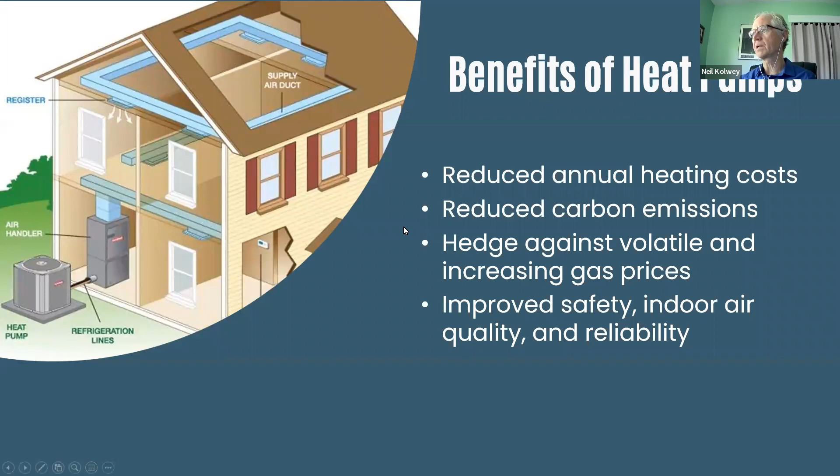So in general, heat pumps are very efficient and they have the potential to reduce heating costs. And in the study, we found that they do reduce heating costs in most of the areas of our region. They significantly reduce carbon emissions. They offer a hedge against volatile and increasing gas prices. And especially if you eliminate gas cooking and have an all-electric home, you can have improved safety and indoor air quality in the home and improved reliability. So a little background for support for heat pumps in the region.

First of all, there are state and utility clean energy goals. Most of the major utilities in our states shown here have goals to reduce their greenhouse gas emissions by 50 to 80% by 2030 or 2035.

And these goals provide the foundation for achieving the significant greenhouse gas emission reductions through adding heat pumps. And these goals are incorporated into the projected 15-year marginal electricity emission factors for these states from NREL that we used in our modeling and in the report. And you can find more information about the emission factors in the report.

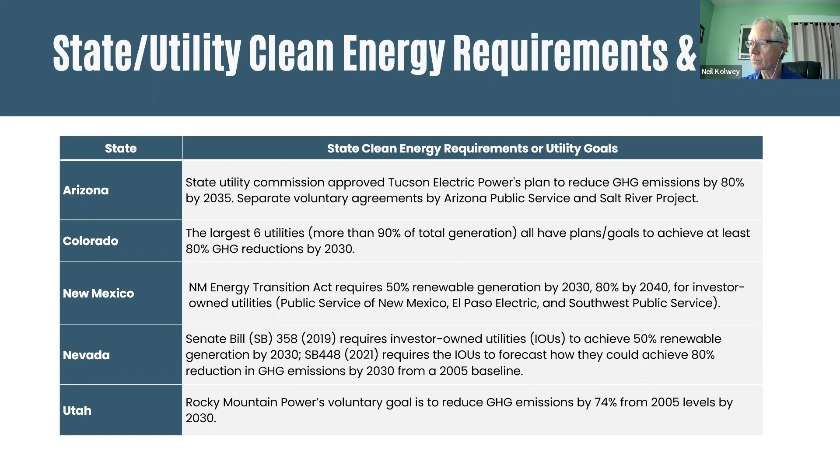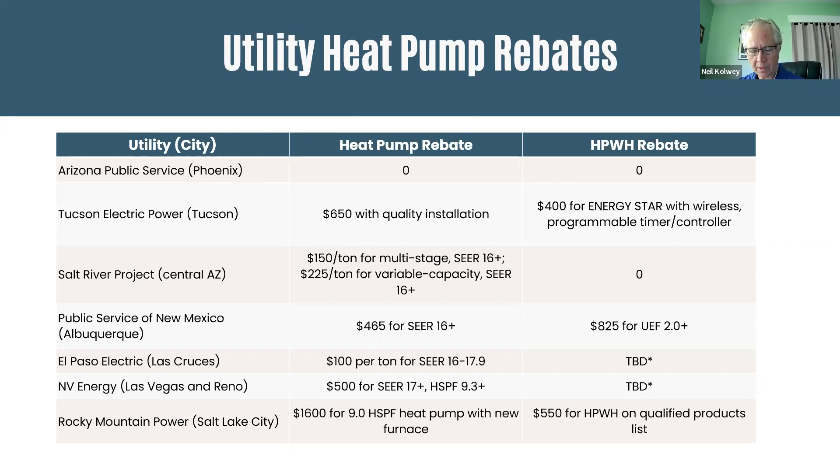And we will talk about our recommendations later, but basically to overcome the incremental cost, we'd like to see around $1,000 per heat pump in the warmer cities for like a 3-ton heat pump, and about $1,800 in the colder cities. And most of these are a little below that, except Rocky Mountain Power's is in the right ballpark. So more about that later.

Training for heat pump installers is very important. And so here's one example of that in our region that I wanted to mention. If the heat pump installer or HVAC contractor is not comfortable with heat pumps, then generally they either try to talk the customer out of them or they overprice them. And so it's important to offer training to overcome that.

So in Colorado, we have a coalition called the Beneficial Electrification League of Colorado, or BELCO. And there's a subgroup that is focusing on heat pump contractor training. And there's been a great collaboration between several of the main utilities in Colorado: Xcel Energy, Tri-State Generation, Platte River Power Authority, and Holy Cross Energy.

And all the qualified installers or contractors who have attended one of the utilities' trainings are listed on our website, loveelectric.org. This website was developed by BELCO and paid for through BELCO. And that's a really good resource for people to be able to find somebody who knows what they're doing. And we've also been doing quarterly meetings with the largest heat pump distributors and manufacturers. So this is a model that could be replicated in other states besides Colorado.

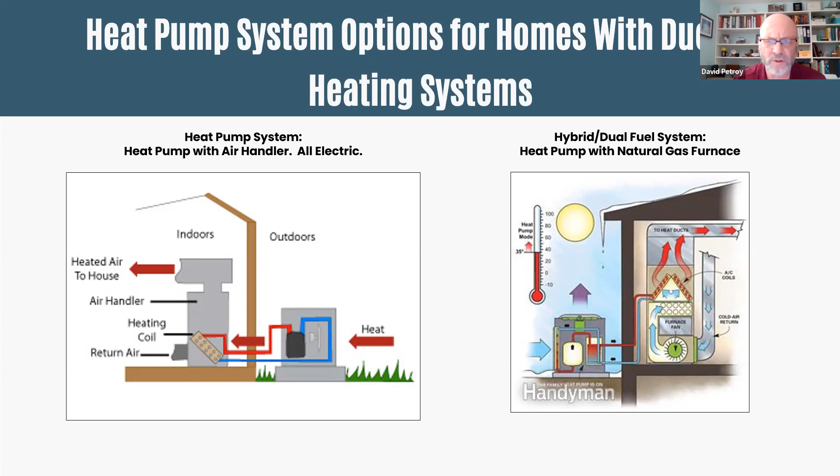And the right side is what's called a hybrid or a dual fuel system. Same thing on the outside with the heat pump. Inside, you've still got your gas furnace, but you're using it mostly as an air handler for most of the year, with the heat pump providing the heat, the gas a bit in the colder months. And we'll talk in a little more detail about that in some other slides.

Next slide, please. Before I do that, another big thing with heat pumps is the multi-zone mini-split or ductless heat pumps. I just want to take a minute or two, since we have a big audience, and just make sure everyone understands the tremendous advantages of this. And I know Rob's going to talk about them also a little bit later.

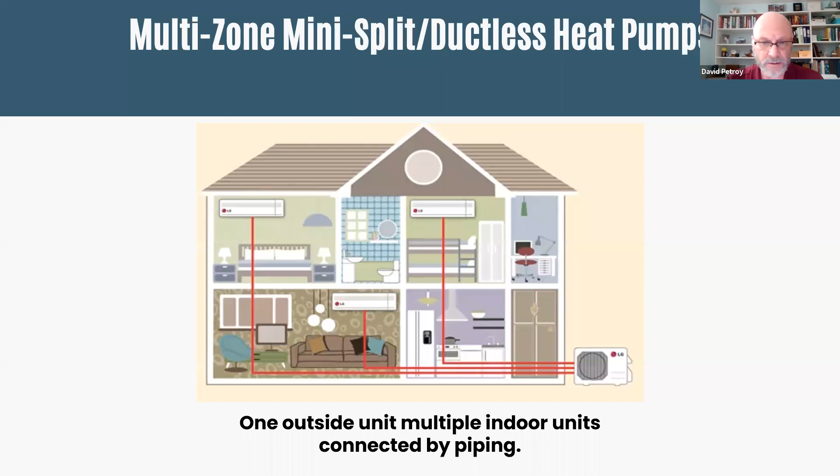But basically, you have an outdoor unit, and originally they were these wall units that could hang indoors and do one individual room each. But in the next slide, Neil, this is the evolution, and it's really been an amazing technology.

You'll notice there's really quite nice units that can go low on the floor. The wall unit shown is kind of an old style, but if you look on the sites, there's mirrored units that look like mirrors, very decorative units. But I want to point out to everyone some of the newer things. And when I say newer, in the last few years, there's basically the ceiling cassette, which is flush. A lot of people like that.

And then on the lower right is what's called a slim duct. And this doesn't seem that interesting, but it is a big jump in the sense that this unit is small, can go in the attic, can go above closets, but it can do 2 rooms. So with a tiny little system, you can actually do 2 rooms, heating and cooling.

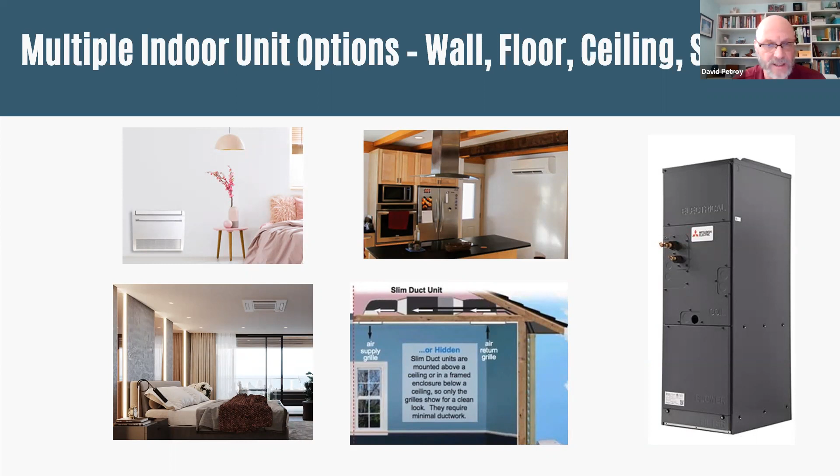And on the far right, some of the manufacturers made it so you can even combine a normal air handler with these. So that could do 3 rooms. So, especially in the world of existing homes, you've got all these ways to retrofit the home and improve it. Next slide, please.

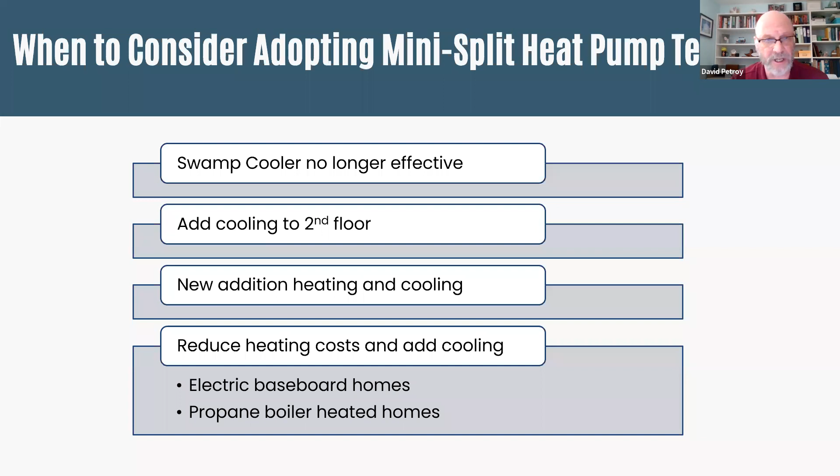Another thing to keep in mind with this technology is you've got new additions over the garage or extensions, and sometimes it makes a lot more sense to do this than expand old inefficient systems. And finally, those with electric baseboard and propane boiler heated homes, these can provide a tremendous cost reduction, and they're very flexible to be able to do that. Next slide, please.

So this is my little history lesson. I used to talk about the history of heating and cooling from back in fire, but I've cut that out for you all today. What I'm calling the rise of the cold climate heat pump. So really, around the early part of this century, the birth of the cold climate heat pumps in North America. There was work in Europe and Japan, they were doing a little bit before us. But really, the engineers and scientists said there's no reason that heat pumps can't work in cold climates. There's nothing fundamental it can't do.

So they had all these components that they could play with inside. They can improve the compressor, the fans, the coils, the computer boards. All these components, if you improve each of them a few percent, it's a big improvement, as I'll show in the next slide. So we had field trials from 2005 to 2010 to make sure that they did what people thought they could do.

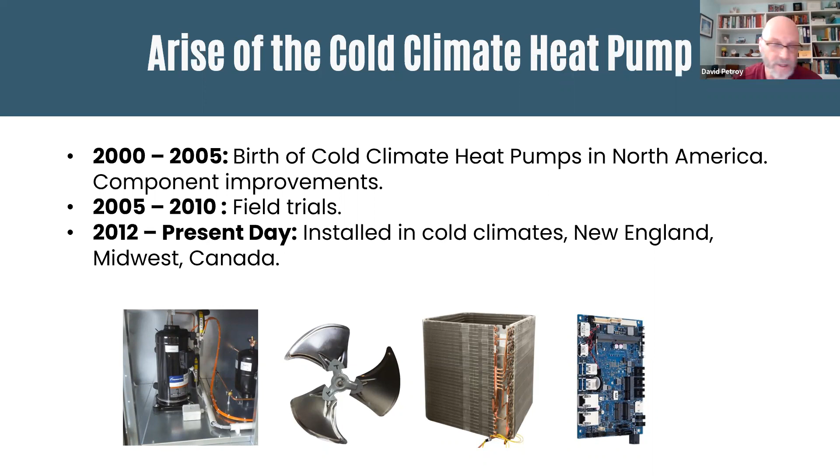And now they've been installed in cold climates, New England, Midwest, and Canada. And in Colorado, it's moving forward quite quickly, and Utah. So pretty much every state, as people become aware of these technologies, that's why we're at this really nice place. Next slide, please. So what did it actually do?

There's like 4 big things for these cold climate heat pumps, and heat pumps in general. The first one: efficiency improvements of 20 to 30%. So that's directly related to, basically think of it as, the cost to operate dropping 20 to 30%. They worked on improving defrost capabilities. You're going to put them in situations where it's really cold and needs lots of defrosting. They put a lot of technologies into that.

The thing that really makes it cold climate is the ability to heat the whole house when it's below 30 degrees. In the past, they didn't really need to think about that, because they were just put in warm climates. And now the capacity, when it gets cold, for this heat pump to carry the heating load of the house is obviously essential. And the final thing is the ability to provide heating when it's cold below 0.

So many of these heat pumps can go down to -5, -10, -13. In a lot of cases, there might be a little bit of electrical to help them out to get through the extreme cold, but these are 4 massive improvements, and that's why we're where we are today.

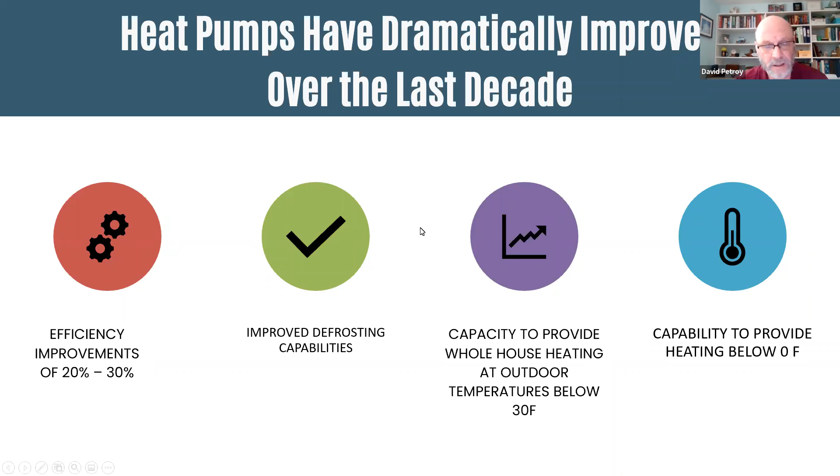Next slide, please. The other thing is energy prices. Nobody knows what's going to happen with energy prices, and neither Neil nor I or anyone pretends to know, but this is kind of an easy way to quickly see how heat pump operating costs compare to the gas furnace world. You can look at the ratio of the pricing, and if you want to know how to do this, people could send an email to Neil or me.

It's quite simple, and the magic number is around 3.8. Basically at about a ratio of 3.8, there's sort of cost parity. So think Albuquerque; around in here is on par. Less than that, the heat pump is much more cost effective to heat, and above it is slightly more. So notice in the warm weather cities right now, the heat pumps are notably less to operate, and even in the cold weather cities, most of them. And I'll show some specific examples from the report.

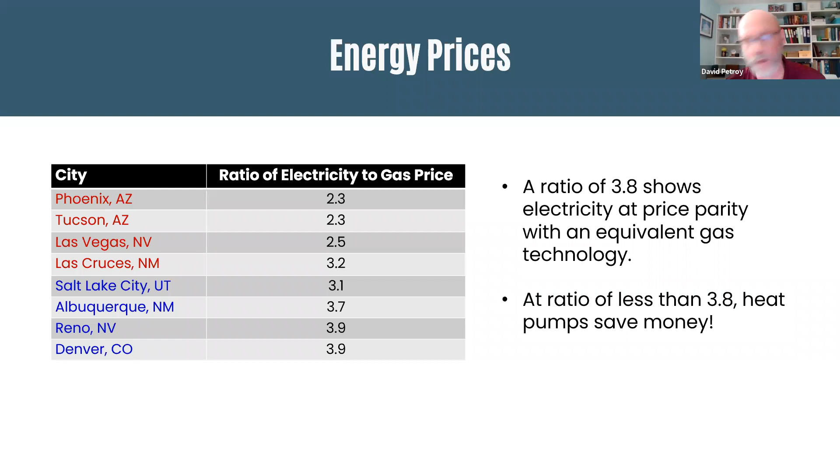Next slide, please. Now, people hear a lot about different kinds of heat pumps. It can actually get very confusing, but we've tried to simplify it here in this diagram. On the left side is called heating season performance factor. The higher the number, the better. On the bottom is called SEER, and I think most people are familiar with that with air conditioning. The higher the number, the better. We're not even going to talk about low efficiency, less than 16. There's still some out in the market, but at this point, the technology is obsolete, quite frankly.

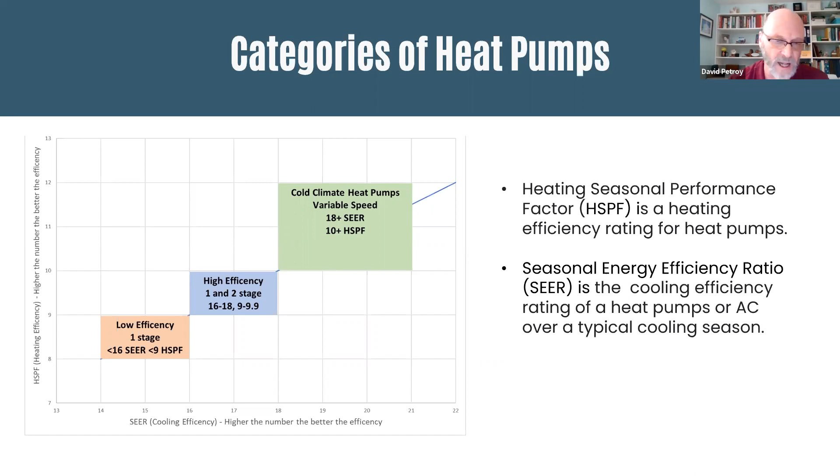Well, let's talk about 2 categories. These are high efficiency 1 and 2 stage, 16 to 18 and 9 to 9.9. There's quite a few of them in there, and we'll talk about when it would make sense to go with those. And then there's cold climate heat pumps, which are variable speed. Variable speed refers to the compressor; 1 and 2 stage refers to the compressor. When you go on websites, you'll see that. And obviously, these are the highest end equipment. Next slide, please.

So the scope of the study, we looked at single family homes with ducts. We compared it to the conventional gas heating strategies. And we looked at warm weather cities. We'll talk about warm weather cities first, and we'll show some results from the cold cities. Remember that a lot of these benefits apply to the mini split scenario too, with regards to retrofitting old homes. Next slide, please.

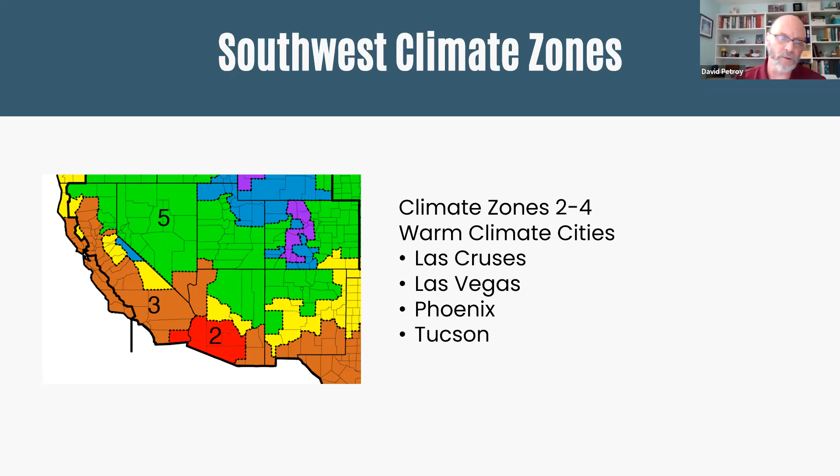So the warm weather cities, you've seen them here. The reason I showed this map is it's climate zones 2, 3, and the yellow is 4. So we're talking about these regions. And though we're focused on cities, the energy savings and the applications of heat pumps apply to anywhere in these regions. It just might be that the pricing of fuels would be a bit different. So really, what we're talking about here doesn't just apply to the cities. Next slide, please.

So how did we get to our results? Well, there's an accepted manual, it's called Manual J8. It's a modeling methodology that basically all contractors should be using. And that's the way they come up with how big of a system do I need for my house? How much heating and cooling does it need, et cetera.

So we built typical homes, 2,000 to 2,500 square feet, existing homes and new homes. We looked at the average energy use in the area and we calibrated them. And then we put in utility energy rates from last fall as we were going into the winter. And from that, we get out how much energy the house will use, what it'll cost, et cetera. Next slide, please.

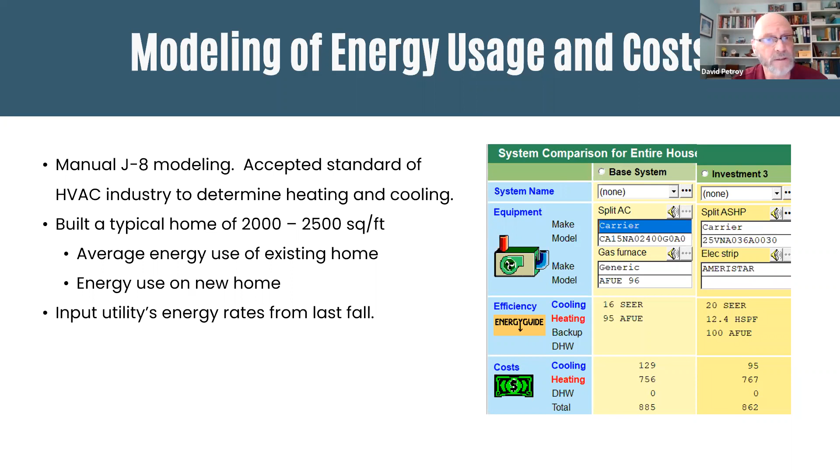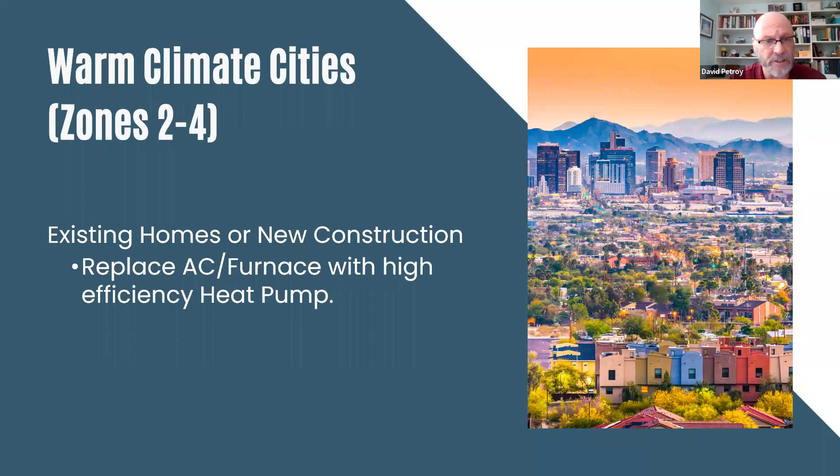So with existing homes, really the best strategy, and honestly, it's hard to envision why there would be another strategy, is really just AC and furnace: you replace them with high efficiency heat pumps. And so let's look at some results from that.

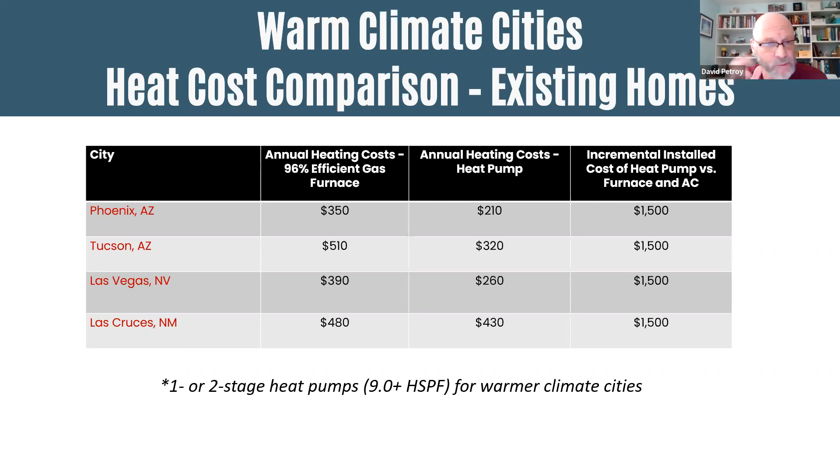So this would be for existing homes. And there's nothing really surprising here. These are some of the results for the homes. This would be the annual heating costs, and this would be the annual heating costs with the heat pump. The left column is furnace. And the right side is typically the incremental cost of the heat pump. The heat pump, as everyone knows, is basically a reversible air conditioner. So there's a little bit more in there. That's a little bit more of the cost. Next slide, please.

So Neil talked about the rebates a little bit. Here we have just the 5 areas, the utilities. We've got what the incremental cost is. A new home would be a little less, 1,000. Existing home about 1,500. You see the rebates. The right column I have there is the rebate for a typical 3-ton unit. And you can see it's a bit less on average than the incremental cost. And Neil will talk about that at the end with some recommendations.

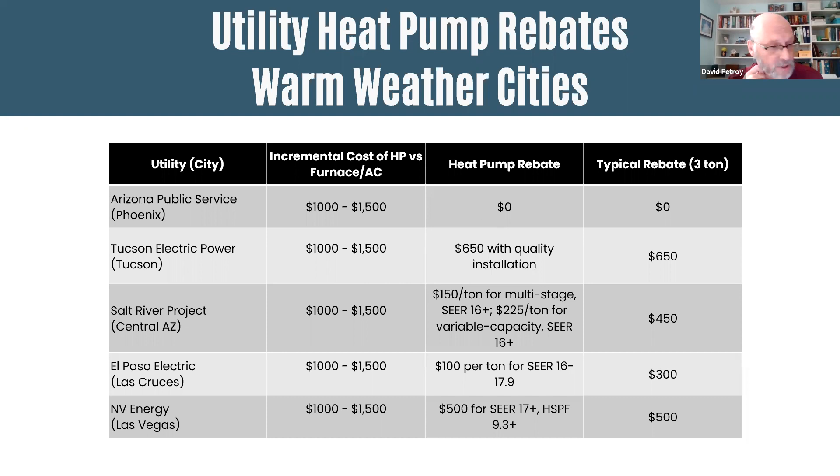Next slide, please. Now, the industry has to undergo a transformation, and you'll hear all sorts of views as to how difficult that transformation is. In this case, it's relatively easy. Basically, the difference between putting in an air conditioner and a furnace versus an all heat pump is just: do you have a gas line and a vent, or no gas and a little extra electrical?

The big thing at the bottom really is controls. With these high efficiency units, they're pretty standard. The AC is 1 or 2 stage. Heat pump is pretty much the same, 1 or 2 stage controls. Now, if you do choose to go up, you can obviously get a variable speed unit and gain efficiency if you have the resources and the means.

Those controls are a little more sophisticated, a little more complicated for contractors, and sometimes they show a little bit of reluctance to that. But basically, this is not a big deal. This is not a big change. Next slide, please.

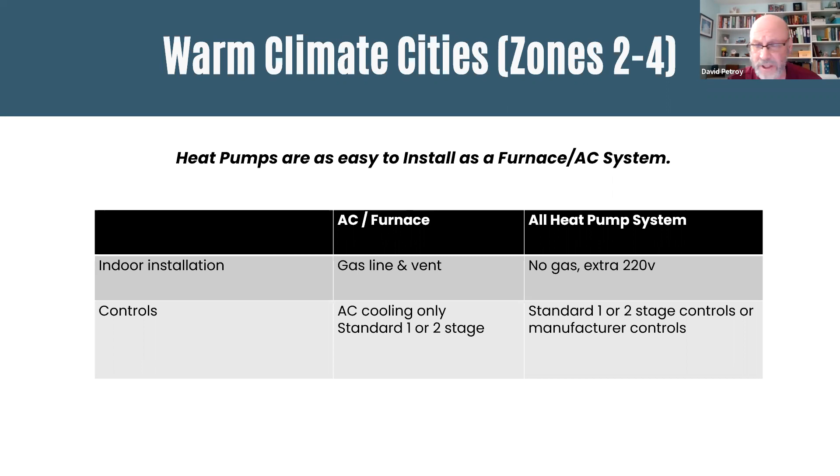So in the warm weather cities, it's a pretty straightforward story. It makes sense to go with the heat pumps. I want to mention a little bit here. There's a range of SEERs for these high efficiency ones. In the warm climates, it would make sense for us to recommend higher SEER ones over the 16s. And if your budget permits, people can upgrade to the variable speed heat pump systems.

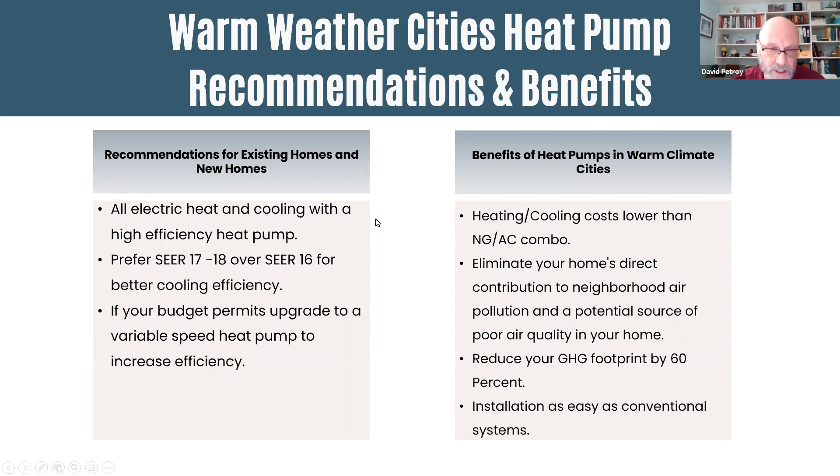And the benefits, Neil went through some of them. You can read them; I'll just touch on them. Obviously, the cost of operation, and everything from local, your house being a little cleaner, your neighborhood, all the way up to the global GHG look. And installation is really easy. So that's the simple story of the warm weather.

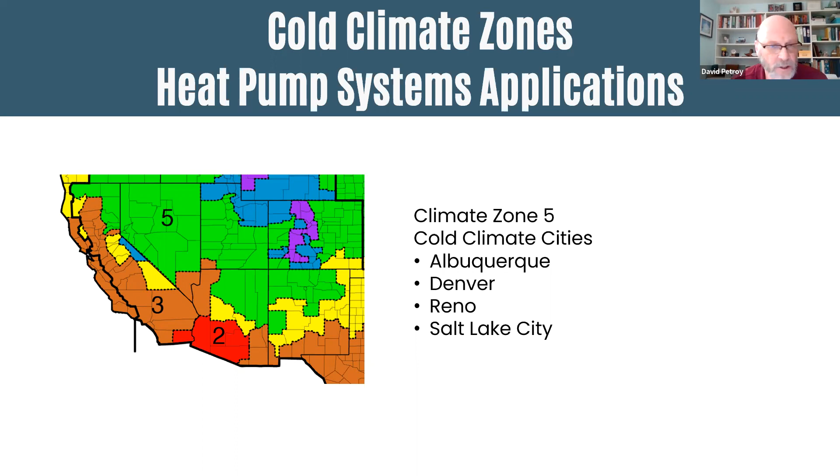Let's talk about the cold weather. For this paper, we did the Southwest, zone 5, which is the pretty green. I've just included Denver from the prior paper for anyone who's on in Colorado, to keep you interested in what we're talking about. So let's go to the next slide. This one I think surprises a lot of people. So let me show you what we got here.

On the left side is the percent of annual heating, so the higher, the more. And on the lower axis is minus 10 degrees F all the way up to 70 degrees. I think most people's gut says most of my heating energy and costs is when it's really cold. But in our climates in the West, that's really not true at all. You'll see the 85% is the total percentage of heating above 25 degrees.

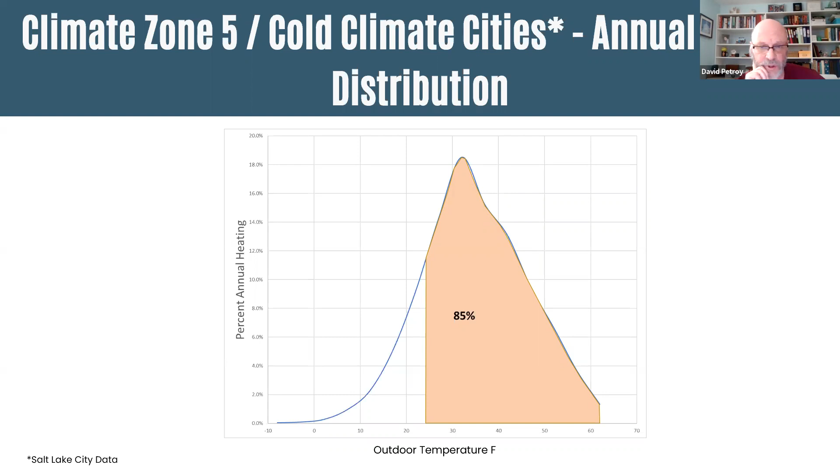And so heat pumps are unbelievably effective there. And we've talked about cold climates; they can even go below. But I think this really puts things in perspective, that fall and spring are really when a lot of the energy is used to heat the house, maybe into early November and late March. Thinking that December and January is where the bulk of the heating is, it's really not. Next slide, please.

So we're looking at the cold climate cities. Now we have some nice flexible options. In existing homes, you can replace the AC and furnace, or just the AC with a heat pump plus furnace, what's called a dual fuel combination, given that there's already distribution infrastructure in the home, all the ducts and how they were designed, the strategy for high temperature heating, et cetera, and the electrical.

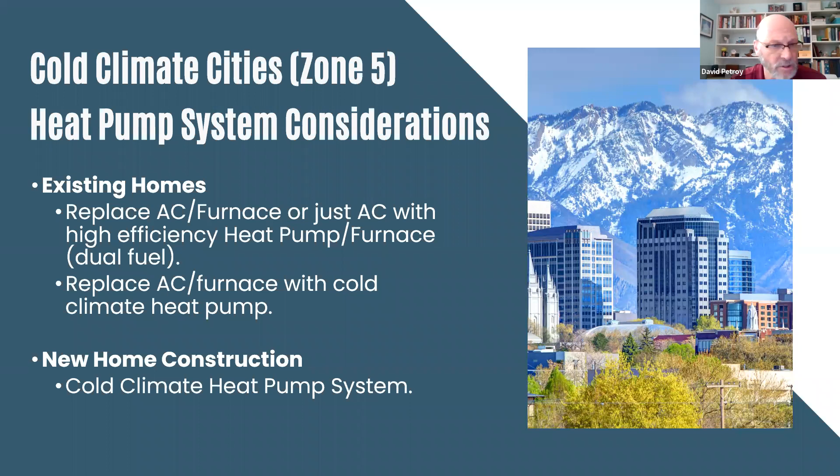So this is a really cost-effective strategy to use. The other one is, if you desire, you can replace the AC and furnace and go straight to a cold climate heat pump scenario, realizing that you have to spend some money and redo some of the old distribution system to make it effective. We'll show some comparisons in new home construction with cold climate heat pump systems. Obviously, the strategy we want to avoid is furnace AC combos in new homes. So next slide,

please. So to give you a little more insight into this dual fuel: if I have an existing home, what happens if I change out? On one hand, you just had an AC that's only going to cool for 3.5 months. Now you've got this heat pump.

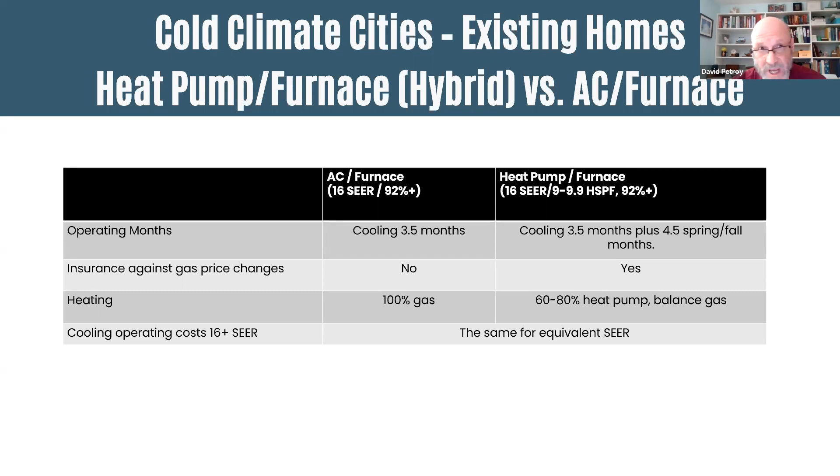It's going to do 3.5 months plus spring and the fall. And the nice thing, line two, that you can think about is now I've got a little bit of hedge against gas prices, because I can kind of set that heat pump and have it do a little more heating, a little less heating, depending on the situation. But in the end, you're really using the heat pump for the majority of your heating, and then you're doing the balance of gas. And the SEER, typically, we're talking about similar SEER levels. We're in cold climates, so cooling is not as big a cost, but it is obviously critical.

And then the next slide here. This is for existing homes. On the left column is the cost with the sort of a gas scenario. In the middle column, go back. No, I'm going too fast for me. In the middle column is the dual fuel scenario.

And as mentioned in those ratios, you can see it's pretty close. The first couple are within $10, $20. It gets a little bit more, but realize we can really look at these numbers and go, wow, one's better than the other, but these are within $5, $10 a month. So looking at the grand scheme, we're pretty much looking at kind of on par systems right now. The incremental cost is a little bit more than the warm climates, because you've got to do a little more outside protective systems, et cetera.

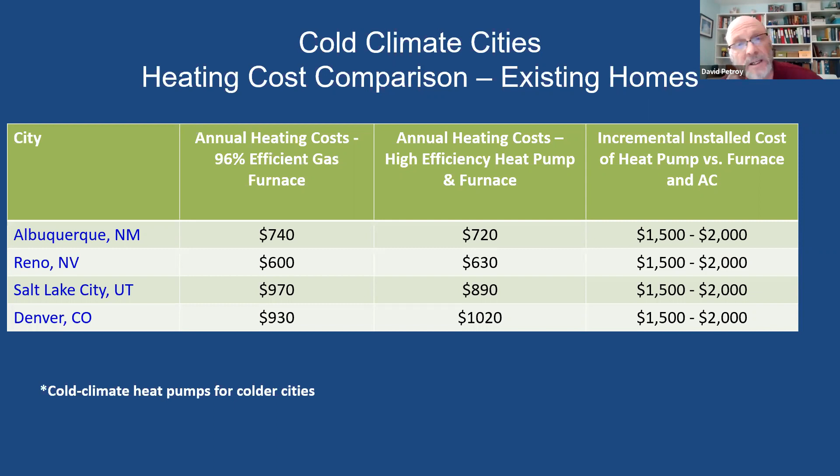Next slide, please. New homes, the story is similar on the cost. We've got a comparison with the furnace on the left column. The middle column would be the cold climate heat pump scenario. And notice overall, the ratio is the same. It's just dampened down. Now the incremental cost is a bit more. And this looks like a hard number, but we've realized that over the states and the cities there's a lot of variation. We're trying to get a reasonable ballpark figure.

Now over in the right column is the net present value, and with the increased cost of cold climate, it's still a little bit negative, or not as favorable for the heat pumps, but we'll talk about that in the next slide, and you'll address that at the end.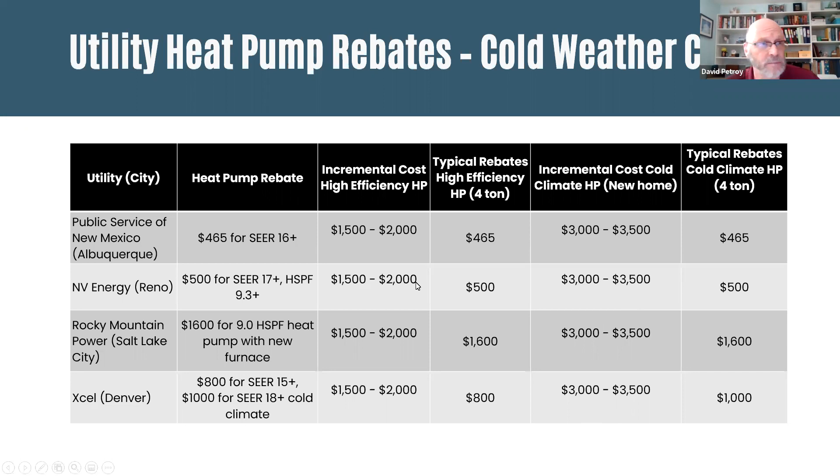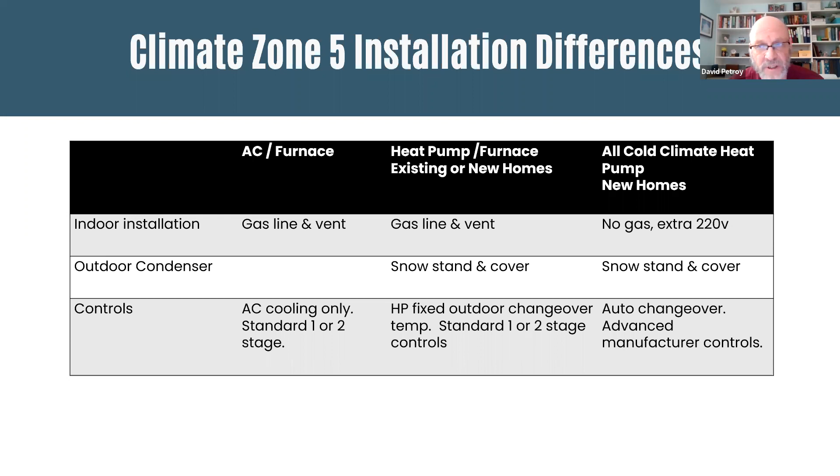The cold climate, I mean, you've got no gas, you've got the extra 220v, but it's really the controls. They're much more advanced. The vendors, the suppliers, everyone's got to have a much higher knowledge level. And so that's really one of the things as a whole society we need to overcome, to think of those as not being that tricky to install. Next slide, please. And that, I'll go back, gets to Neil's slide about training and education, which we're finding in Colorado super helpful.

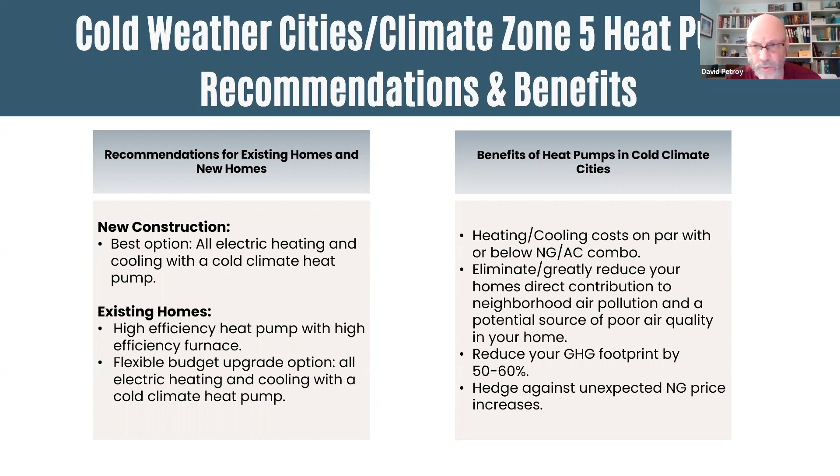And so, we're looking at existing homes and new homes in the cold climates. New construction, the best, right option is all electric heating and cooling. We don't want the AC furnaces. Existing homes, you've got the dual fuel option, and you've got the option to also upgrade to an all electric heat pump if you want to redo your distribution electrical system. The benefits are basically the same benefits. You can read them, but basically the same benefits as with the warm weather cities. So benefits across the spectrum.

And the final thing is the GHG emissions. Neil mentioned it, looking at over a 15-year period, the whole lifespan of this. So this is critical over the next 15 years, and it's 50 to 60% based on the current projections for the various utilities and how fast they're going to make the grid green. And we use the NREL data, the latest data on that model. So this gives you the bigger picture benefits. Next slide, please.

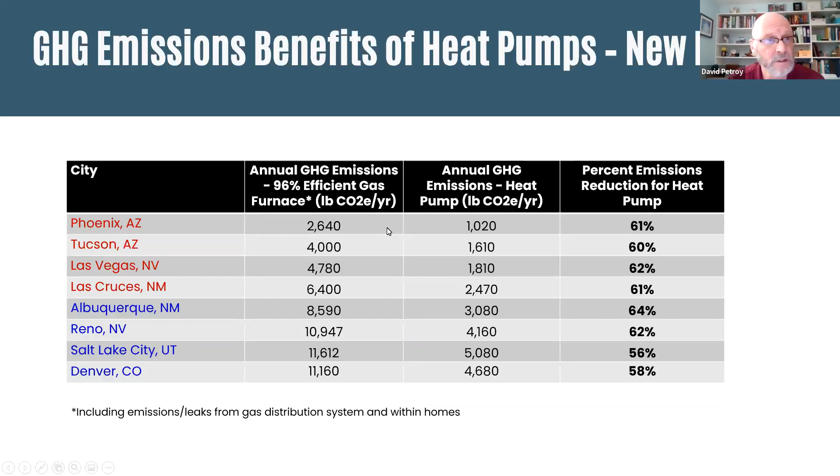And with that, I'm going to hand it back to Neil. Okay, thanks, Dave. Hey, Neil. Yeah, I'm going to jump in for 2 seconds.

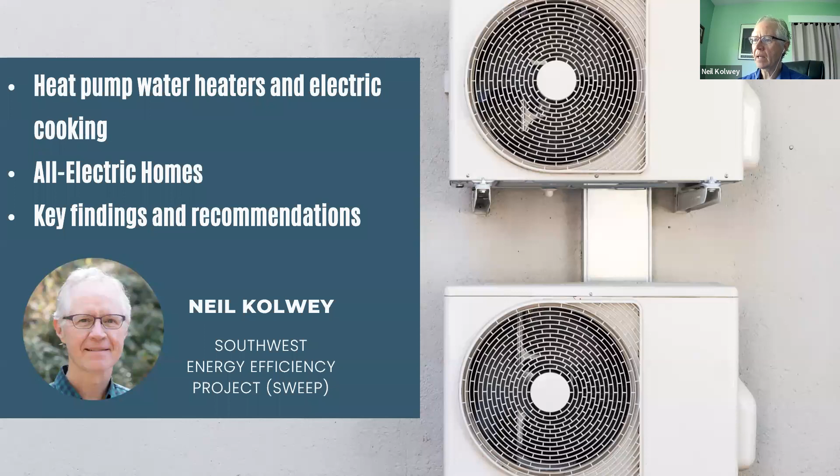Go ahead. Sure. Just a few more slides in our part here. I'm going to talk about heat pump water heaters and electric cooking briefly, and then all electric homes, and then wrap it up with our key findings and recommendations.

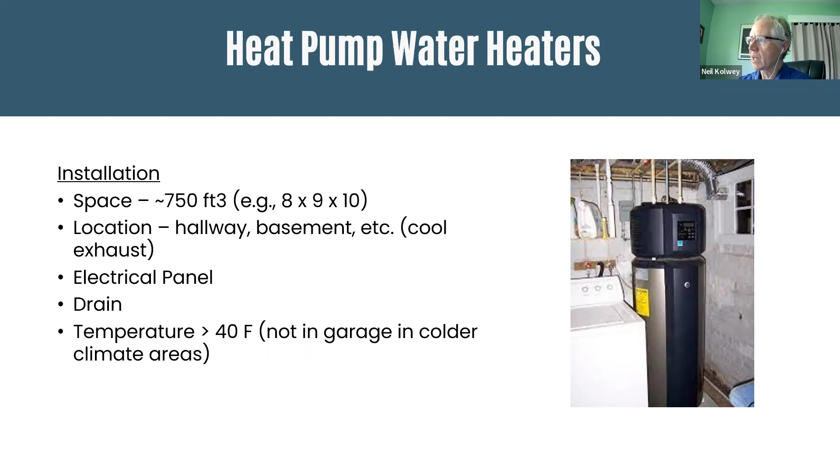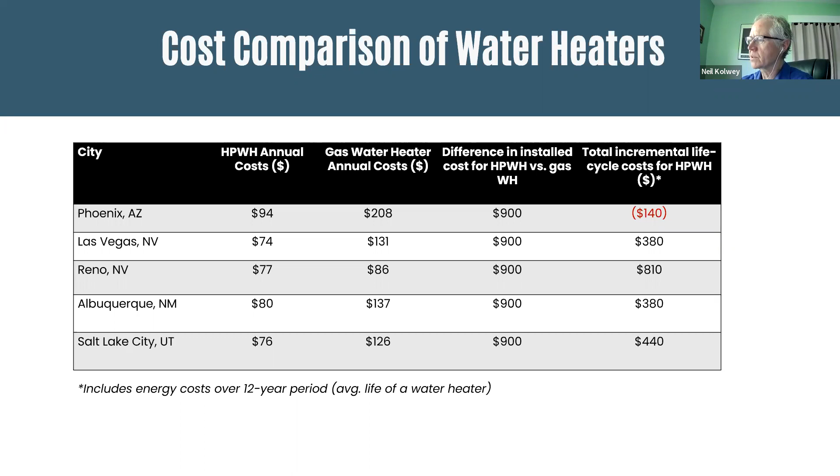And the last column just shows the total incremental life cycle costs, which are generally around 400, meaning it costs 400 more over the 12-year life, except for Phoenix, where you actually save $140 over the 12-year life. And they reduce greenhouse gas emissions 65 to 69% for all the different cities we looked at. They're a bit more efficient than heat pumps for space heating.

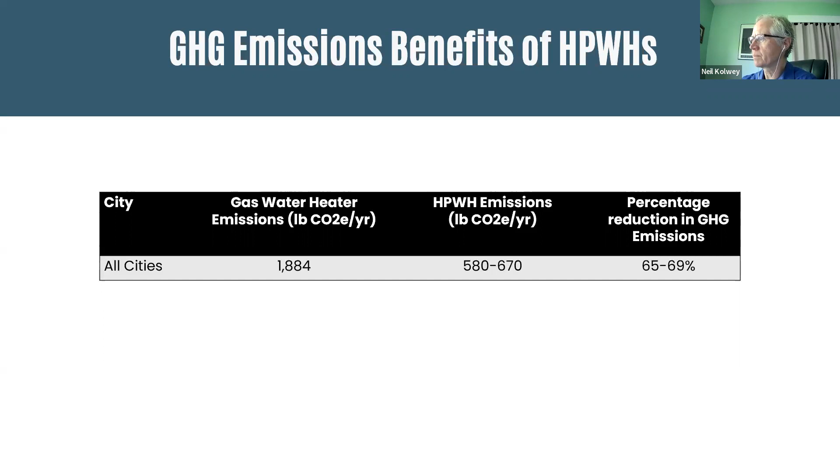So let's talk briefly about electric cooking. Gas cooking emits several types of pollutants, including nitrogen oxides, formaldehyde, and potentially carbon monoxide, which can contribute to poor indoor air quality and potential health issues. Electric cooking eliminates all of those. Gas stoves also leak methane, which causes their overall carbon emissions to be significant.

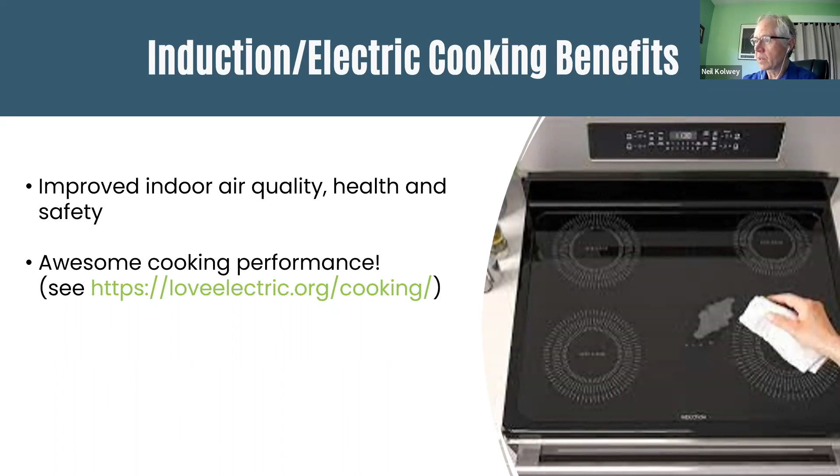So induction cooktops are great. This picture is showing that they're very easy to clean and they're safe. The surface doesn't get hot. They only heat up the pots and pans, and they work amazingly well. And you can see some videos showing how well they work at our website, loveelectric.org/cooking.

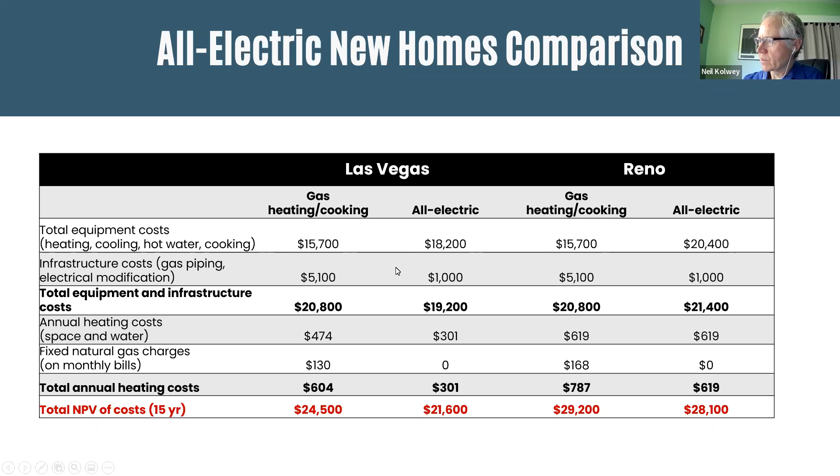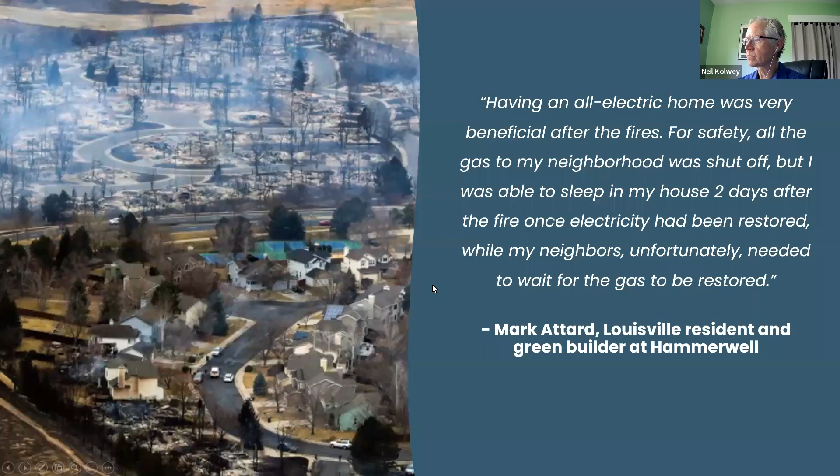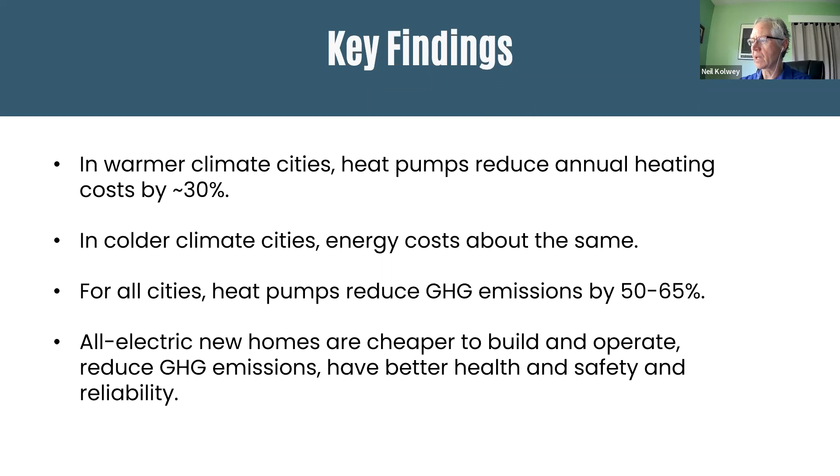Now I'm going to summarize here. Our key findings: in the warmer climate cities, heat pumps do reduce the annual heating costs and can be as much as 30%, like in Las Vegas and Phoenix. In the colder climate cities, generally the energy costs stay about the same. And for all the cities, heat pumps reduce the greenhouse gas emissions from the home by 50 to 65%. All electric new homes are cheaper to build and operate, based on the total life cycle costs I just mentioned. They reduce greenhouse gas emissions significantly and have better health and safety and reliability.

So to get all of those lovely benefits, here are some of our recommendations. For utilities, we recommend that they offer rebates for cold climate heat pumps and additional incentives to encourage all electric new homes. For existing homes, we suggest emphasizing replacements of central air conditioning systems with heat pumps and reducing the AC rebates and increasing the heat pump rebates.

And here's our suggestions, 2 tiers of heat pump rebates. As Dave discussed, the efficient 1 or 2 stage heat pumps with these specs. We would like to see a rebate of around $1,000 for the warmer climates and $1,800 for the colder climates to overcome some or most of the incremental cost. And for the cold climate heat pumps, we'd like to see a rebate of about $2,500 to help reduce some of that incremental cost. And supporting and collaborating on heat pump contractor training programs is very important, as I mentioned.

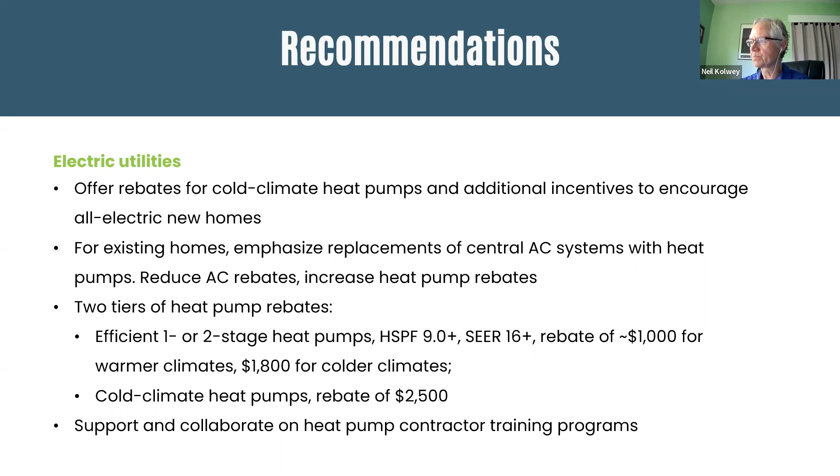For state public utilities commissions, we'd like to see favorable rate structures that support heat pumps, for example, time of use rates. And to avoid the expansion of gas piping infrastructure, we encourage them to push electric utilities to provide higher incentives for all electric new homes. Finally, local governments, we'd like to see expedited permitting and reduced fees for new heat pump systems and all electric new homes, and to update building codes to require all electric preferred, or at least electric ready new homes.

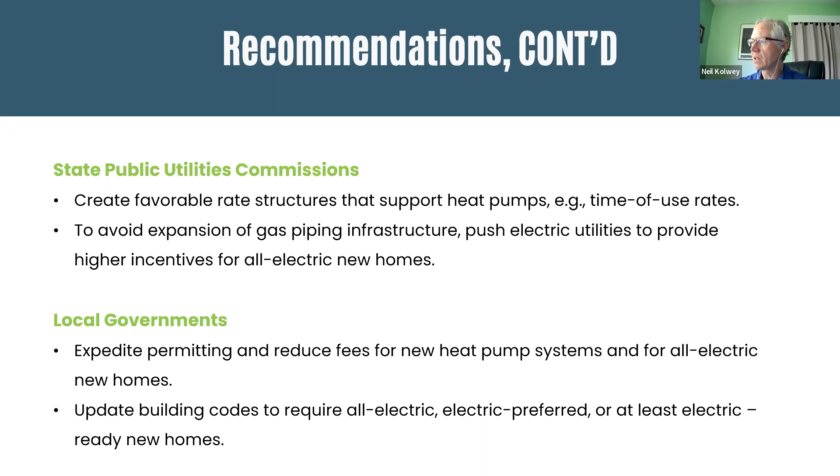And the other thing is just everybody needs to work together to continue to educate consumers about the benefits of heat pumps and to encourage people to stop putting in air conditioning. And now I would like to turn it over to Rob. We will save our questions until after Rob's presentation.

Rob Foley has worked in residential construction for almost 40 years. He is a BPI certified energy auditor and a QCI inspector. He has conducted hundreds of energy audits, capital need assessments, and energy efficiency models. His knowledge of construction plus building science allows him a unique perspective for helping multifamily owners develop cost-effective approaches to energy upgrades and their carbon reduction goals. Rob?

I guess I get to unmute. Thanks, Neil. So I'm going to chat about multifamily for a few minutes, because while Neil and David's work is outstanding and helpful in helping people to make good decisions about heat pumps in single family, a lot of the lessons they've learned don't really apply to multifamily. So let's jump into that and I can explain why.

So next slide, please. So ICAST is a nonprofit, a 501(c)(3). We're based in Lakewood, Colorado. We do a number of things in the multifamily field in particular. That's where we decided to stake ourselves in trying to help multifamily properties to become more energy efficient, reduce their carbon footprint. And in particular, we focus on low-income multifamily, which, when it comes to building technologies, is the hardest part of residential to work in, because there's not a lot of money in low-income multifamily, and so you got to bring a very strong case to get low-income properties to upgrade their mechanical systems and reduce their carbon footprint.

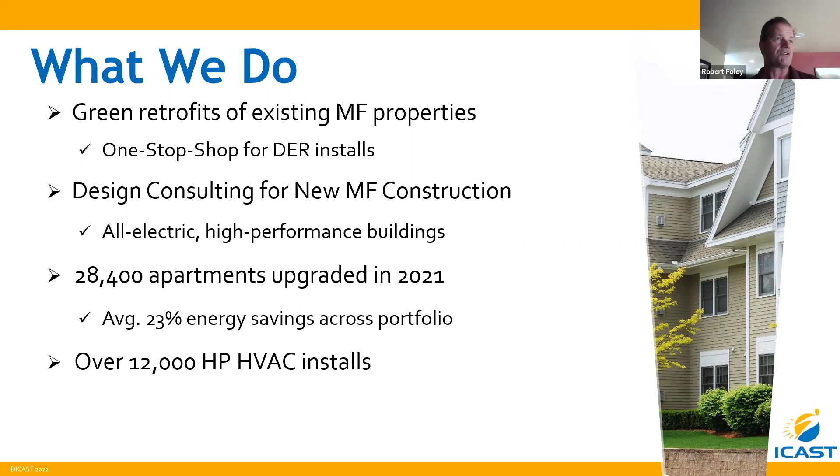Next slide, please. So I want to give you 3 quick case studies where we implemented heat pump installations. But I just wanted to mention quickly that when it comes to what David was talking about, these mini splits, the industry, the manufacturers have really created a problem for themselves, because we got too many labels for this equipment, and many of those labels are distracting. Mini splits, ductless, hyperheat, right? The important things are 2 things: that they're heat pumps, and that they're hopefully high performance or cold climate heat pumps. That's what's important. And these other labels a lot of times just add confusion.

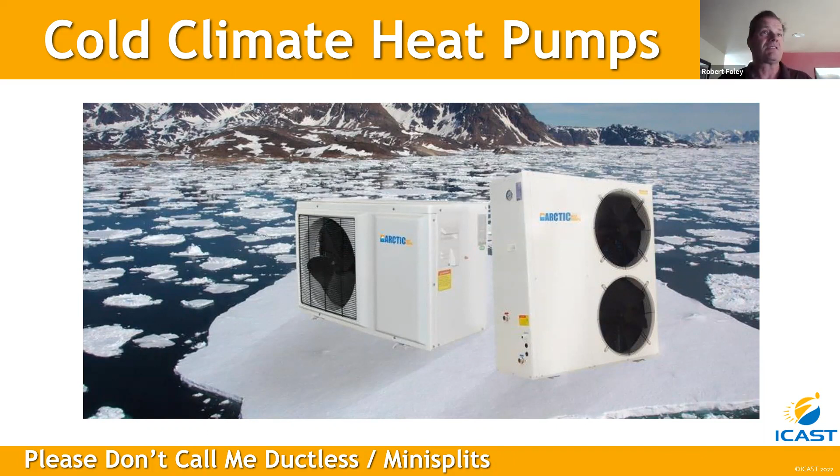They're important to contractors, so they understand what they're installing, but to the end user, unfortunately, we sometimes are our own worst enemy in that we're using too many terms, when if we kept it simpler, it'd be a lot easier to communicate the benefits of these technologies to people. So, next slide, please. Let's talk about these case studies. These are all in Utah, these 3 studies we're going to talk about.

This first one, they had resistance electric heating. They were small apartments, and so where the outlets for the furnace were made it difficult for them to locate their furniture. So one of the things that we did there was we put in high wall head mini split type systems. And in this case, we got about $40,000 in rebates from the utility, from Rocky Mountain Power. We got about a 5-year payback on this one in terms of the energy savings, which in this case, the property owner was paying the utilities, and so that was a powerful incentive for him. That's an easy sell when you can pay back the improvements in 5 years.

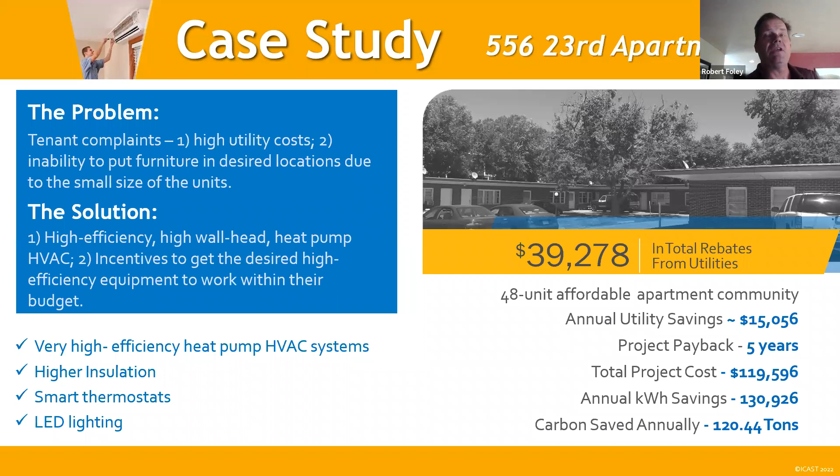That's our bread and butter when we can find those. But a lot of times that's very hard to find for a couple of reasons. The big one being the split incentive, which is that most of the time a property owner isn't paying the utilities. And so his motivation isn't going to be the savings from utility savings. It's going to be something else. And we'll get into that in a second. Let's go to the next study.

Next slide, please. Here we had an 8-story high rise that had an existing boiler and chiller that were about 40 years old. It was time to replace them. And here we went away from gas heating. So this is one of our big success stories. We replaced the gas boiler with heat pumps, individual multi-head heat pumps in each of these apartments, and 300,000 kilowatt hours saved annually. But even in gas heating, we made this a viable economic proposition for the property owners that allowed them to move away from gas heating. But it took a lot of incentives from the utility, in this case, almost $75,000 in incentives to help move the needle, help get the property owners to move away from gas.

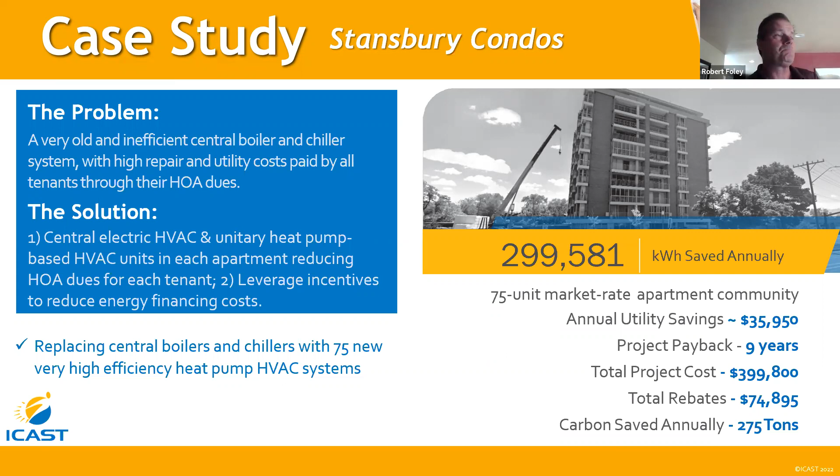Next case study, please. And here are the Kirk apartments. They had electric baseboard heating, and we were able to put in high efficiency, high wall head mini splits in this case, and average annual utility savings of $30,000.

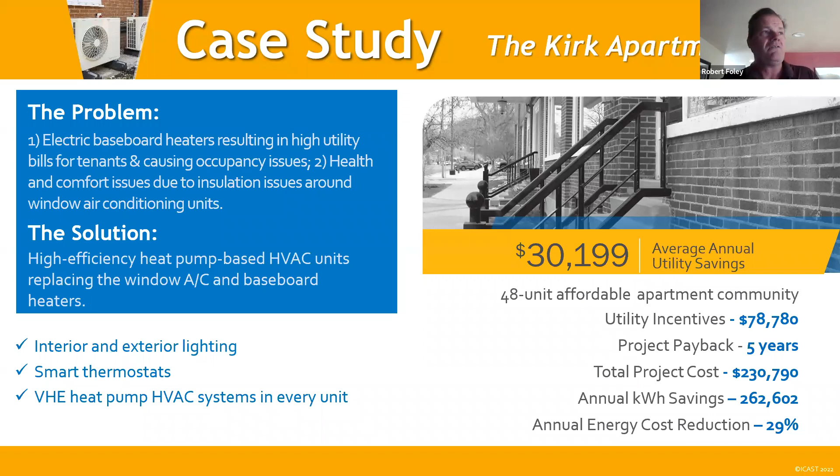So again, when we've got resistance electric heating, the economic case is very powerful. But only if we're talking to the person who's paying the utility bills. So what I want to just concentrate my time on now is talking about the lessons we've learned over the years when it comes to trying to implement these high efficiency technologies in multifamily.

The big one is that incentives, rebates, and grants are critical in multifamily. And they're critical for one simple reason. Most of the time, the person who's making the decision about replacing or upgrading equipment is not paying the utilities. So energy savings isn't the way to sell this to property owners. It's all about what's the bottom dollar, right? And so most multifamily property owners, their strategy for replacing mechanical equipment is called replace on fail. If it ain't broke, we don't fix it. And when we do fix it, we fix it with the cheapest thing we can find.

And so that makes our job very difficult because we've got to figure out a way to put together a package where the least expensive option they have for replacing their equipment is a high efficiency heat pump. And so incentives have to cover that incremental cost difference between the cheapest option and the high efficiency option. That's critical in multifamily, which is about a third of the housing in the country. So whereas incentives aren't the biggest driver in single family, they are absolutely the biggest driver in multifamily because of that split incentive.

Building owners are just not moved by energy savings. Now some, especially in higher end multifamily, are motivated by carbon savings. They might have a sustainability office, but it's not dollar savings because they're not getting the dollar savings.

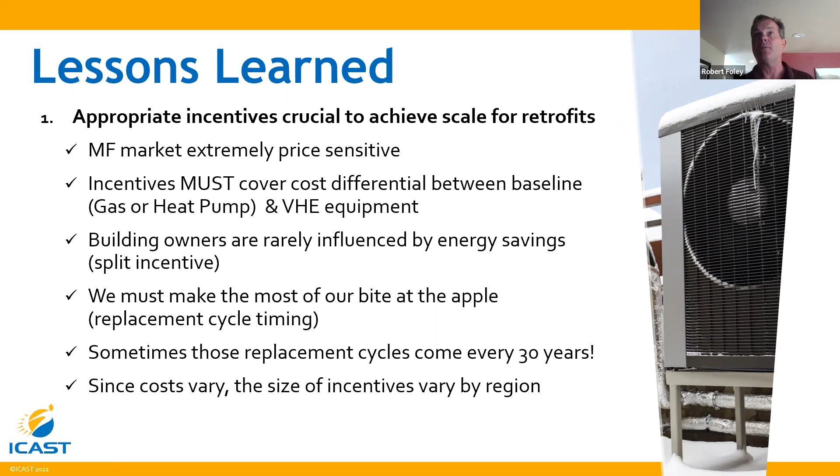So every time multifamily owners are thinking about replacing equipment, we've got to be in the room talking to them about the benefits of heat pumps and heat pump technology. We've got to make the most of those limited opportunities. And so we need incentives, and we need them right now in order to make heat pump adoption in multifamily viable. So the next slide, please.

And so dual fuel, like David talked about, is a very powerful help for us in multifamily, partly because it's familiar technology to multifamily owners in the sense that they already have a gas furnace. If they've at least got that as their backup heat, that makes the comfort level greater to move toward heat pumps. And it's all about capital cost for owners. So if we have a dual fuel approach, sometimes that means we can use a less efficient heat pump that's less expensive, because capital cost is the big driver with property owners. And so reducing that cost by having a dual fuel approach is helpful, especially if their existing furnaces aren't that old, and we can use the existing furnace and just add a heat pump to it as the primary source of heat.

And when it comes to scaling, it's not about the cost of energy, it's the capital cost that's the key component, right? And so we are focused on helping to put together strategies and approaches that make that heat pump the least expensive option, especially when we have existing apartments that have central air conditioning. That's where we're giving the pitch to our property owners, when they're replacing their air conditioners. We're saying, instead of replacing your air conditioner with an air conditioner, we think you should replace it with a heat pump. And we have such fabulous incentives available that it will actually cost you less than replacing your air conditioner with the cheapest air conditioner you can buy.

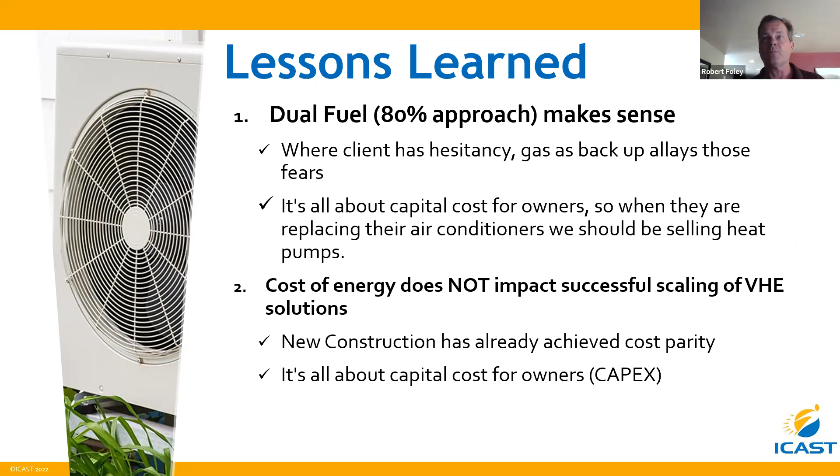That's kind of the value add that we try to bring to property owners, to try to convince them to move toward a technology they would never adopt, because that's just not their business model. That's not their approach, unless somebody educates them. And that's how we try to move the needle when it comes to building owners. Next slide, please.

We also have real challenges with contractors, as Neil and David and I discussed, right? Getting contractors on board to heat pump adoption is a critical component. So many contractors installed heat pumps in the 70s and 80s and had bad experiences with them and kind of left that behind, especially in cold climates. And so it takes a lot of work, a lot of education with contractors to help them to understand that the technology has changed and this is the way that we're going, so that they become a partner instead of a roadblock when it comes to heat pump adoption.

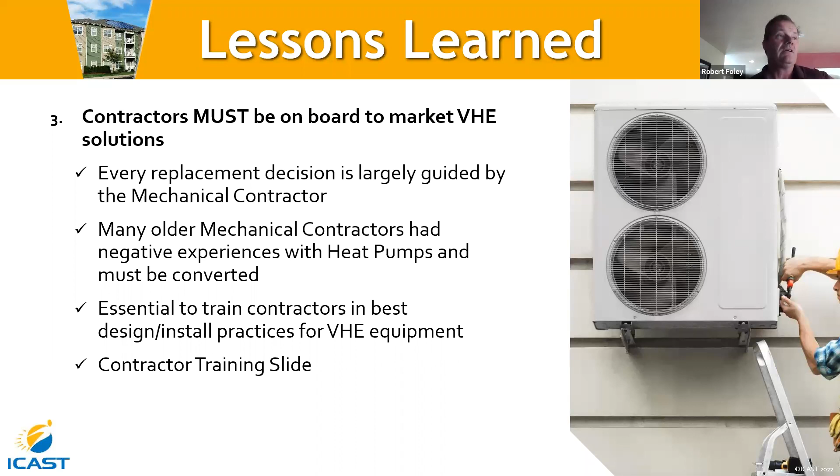And so a lot of that involves training. And so we are involved in a lot of assisting contractors to become much more familiar with heat pumps, and in particular cold climate heat pumps, so that we are installing them where we can.

So in terms of incentives, rebate programs, we need to keep those programs simple and easy for contractors or for homeowners to use them. So often, in my experience with rebate programs, I've been working in rebate programs for a dozen years, it's not worth the time to fill out the paperwork, because the paperwork is either so cumbersome or the incentives are so small that we got to keep those programs simple. We have to make it easy for the end user to use those fundings to overcome the incremental additional costs of these higher efficiency systems.

And then the other thing that we need to do when it comes to rebate programs is we need to get rid of the low-hanging fruit. We have been replacing light bulbs and shower heads for 40 years. It's time to move on and just focus on deep retrofits. That's where we're actually going to reduce emissions. That's what we need to be spending rebate dollars on. And so,

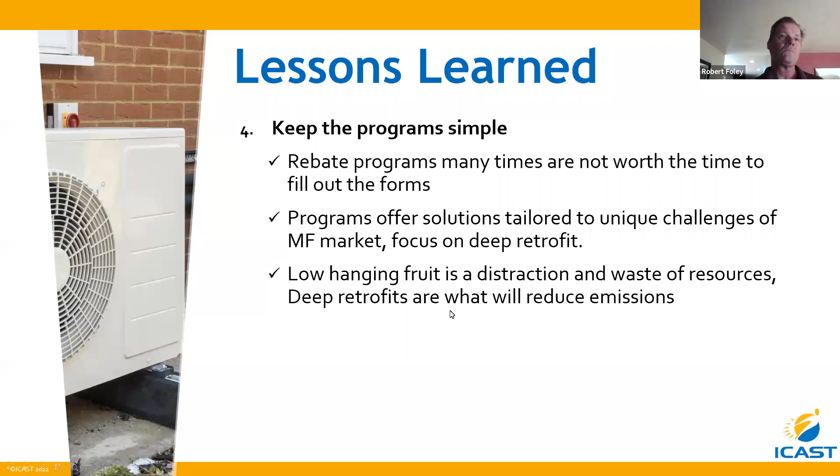and then in terms of policy changes, right? We need to recognize that high efficiency heat pumps is where it's at, and that's what needs to be incentivized. Especially for new construction and for major rehab, we need to give the developers, the builders, the contractors, all the dollars they need to make sure that they're making the right choice toward high efficiency and toward beneficial electrification.

Like Neil talked about, time of use rates that reward efficiency, as opposed to like what Black Hills in Colorado does. We need to incentivize the cost of carbon, right? Nobody's doing that yet, right? And if we had those dollars as well, we could have a lot more dollars to throw at rebates and incentives. Our rebate system is based on an old model. It's based on how much energy are we saving the utility, and we need to move away from that, because what's much more important than saving the utility the cost of building a new power plant is reducing carbon. That's where the dollars need to be.

We need to eliminate rebates for air conditioners. Neil talked about reducing them. We need to get rid of them. We need to incentivize heat pumps, not air conditioners.

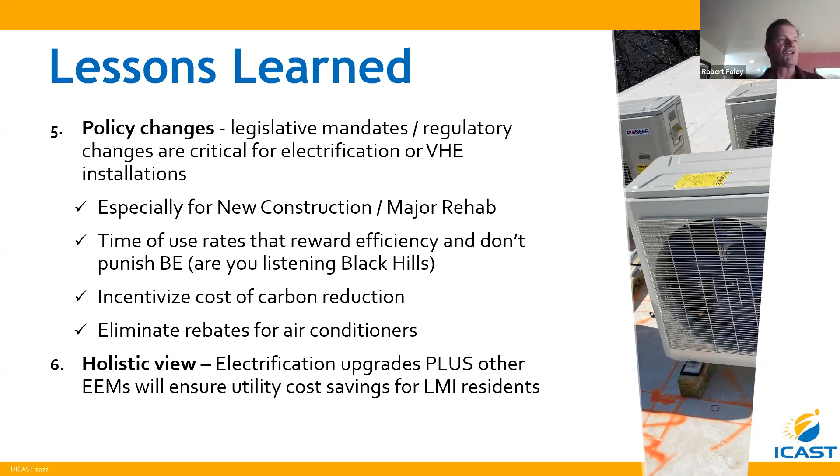And finally, last slide, please. We're also working hard as part of our workforce development to help train, particularly entry-level mechanical contractor apprentices, so that we've got a lot more of an educated workforce to install these new technologies. So we're working hard in our little field of multifamily to help move the needle in heat pump adoption, and happy to answer questions about that as well.